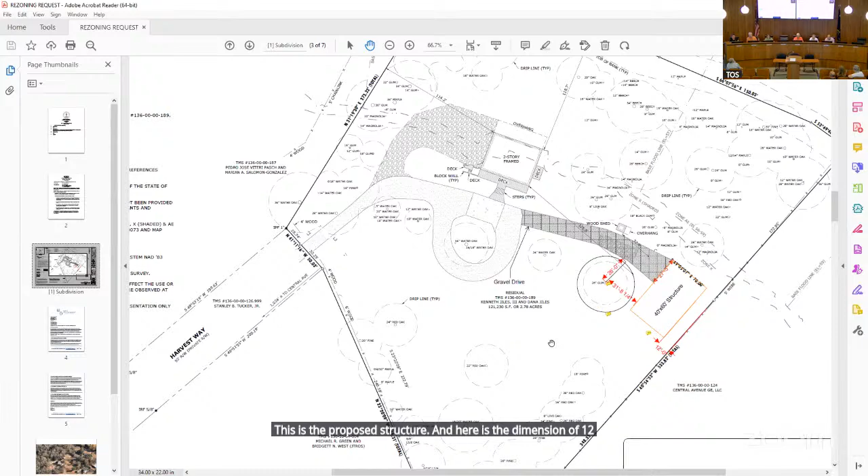Here is the primary residence. The property is accessed off of Harvest Way. This is the proposed structure, and here is the dimension of 12 feet from the property line. I'll jump to some pictures really quick before I hand it over to the applicant.

Y'all will just need to talk through your statement that was provided and answer any questions the board may have. So again, here's the primary residence. The building would be approximately in this location. And I believe this is Central Avenue. Yes, so just to give you guys an idea of where you're at.

This is just another view of the property. Again, this is Central Avenue down here. Harvest Way is right here, and that's where the property is accessed. The building would be approximately here.

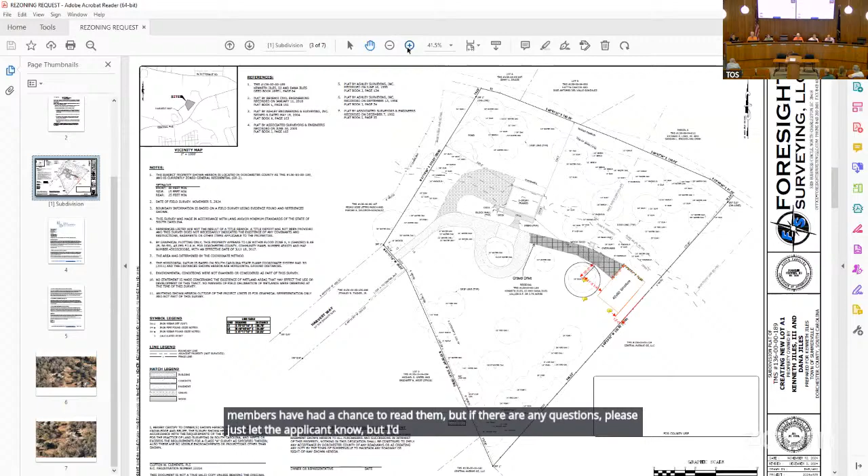Yes, sir. Are you one of the owners? No, sir. I'm actually the contractor. The contractor? Yes, he's probably better suited to answer most of the questions, but I'm happy to answer what I can. Okay. Any questions?

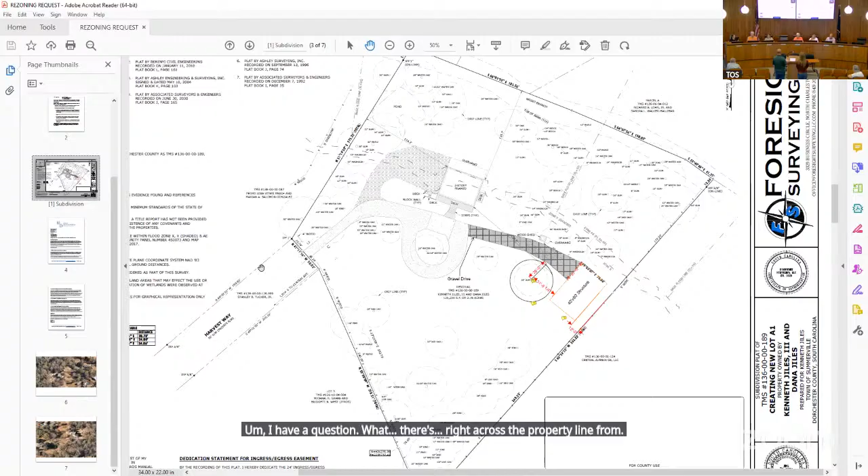I have a question. There's right across the property line from the proposed building, there's a couple of structures. What are they and how close are they to the property line on the other side? You're speaking of where we're wanting to build this structure, correct? Okay, there are a couple of businesses right on the other side. I believe it's a church that backs up to us. The building that's closer to Central that you can see, yes, I believe that's a church. But there's a couple, I mean, there were a couple on the other aerial. Becca, can you go to slide 7?

I think, yeah, that one. If this is the property with that giant oak tree in the middle, this is actually slated to be a restaurant use, but they are still working on it. Oh, I think it was a church and they just closed that church down and now it's, yes, they're going to become that. They're still working through permitting, but that was the last I had heard.

What are these structures? There are some accessory structures on the property. Really, they're just used for storage at this time. They have to maintain the existing vegetation back here if they do want to move forward with the commercial use. They were planning on having some food trucks stored behind here for use. They can't remain on the property, but they're just storage buildings.

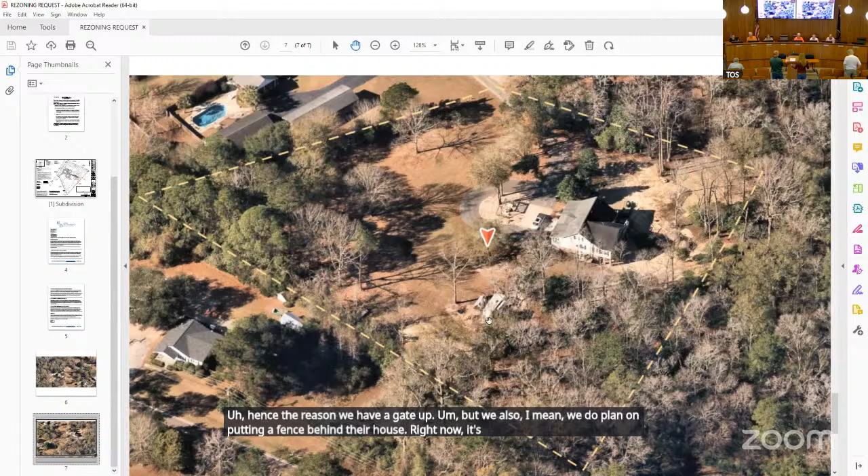Hence the reason we have a gate up. But we also plan on putting a fence behind their house. Right now it's just a chain link fence, but we do plan to put up a wood fence to kind of negate that noise.

Any other questions? Can I have a motion? Anybody? I just, 50 to 12 is a heck of a lot. Fifty to twelve is a heck of a lot.

I just want to ask, what made you guys choose 12? That is three times the distance required, but I think what they're trying to do here is save the trees and everything that's out there, and that's why they've got to sit back so much. And I believe that's a gum tree. Okay, it's a poplar, it's a beautiful, beautiful poplar tree.

My daughter has a swing set up on it, and it's one of those staples in the front of our yard. We used to have a beautiful water oak right in front of our house, and that fell the year after we moved in. I absolutely love that tree.

I don't like cutting down trees, and it's a beautiful tree, and it will make a beautiful little front yard for this structure. I know it sounds silly, but that tree is just beautiful and I love it, and I don't want it to come down.

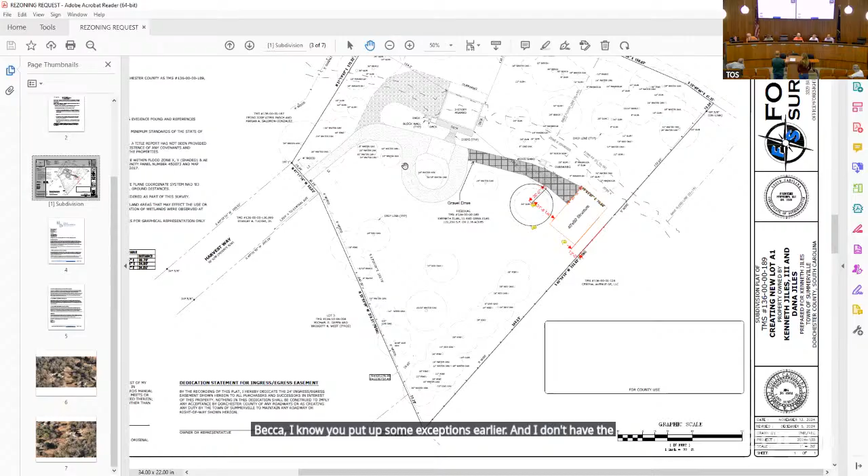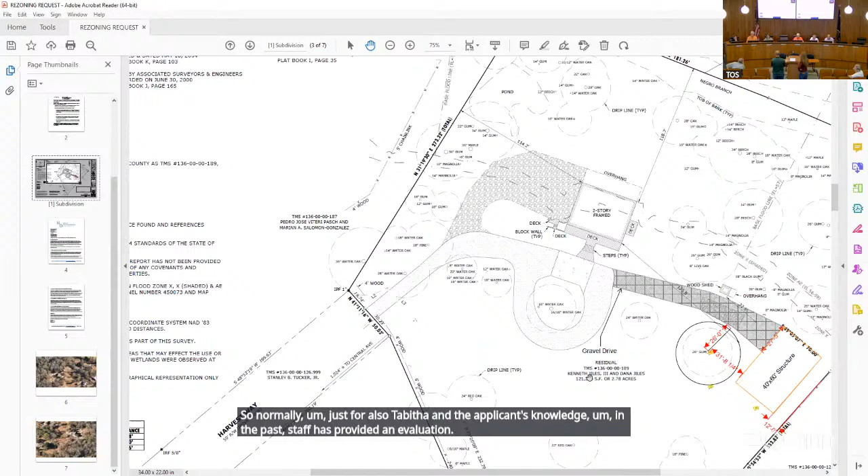Becca, I know you put up some exceptions earlier, and I don't have the packet in front of me, but did anything in the request meet the exception requirement? So normally, for Tabitha and the applicant's knowledge, in the past staff has provided an evaluation of the four criteria, but after looking at how the state addresses Board of Zoning Appeals requests, we felt it wasn't appropriate to have staff influence on that. But if you're asking for my...

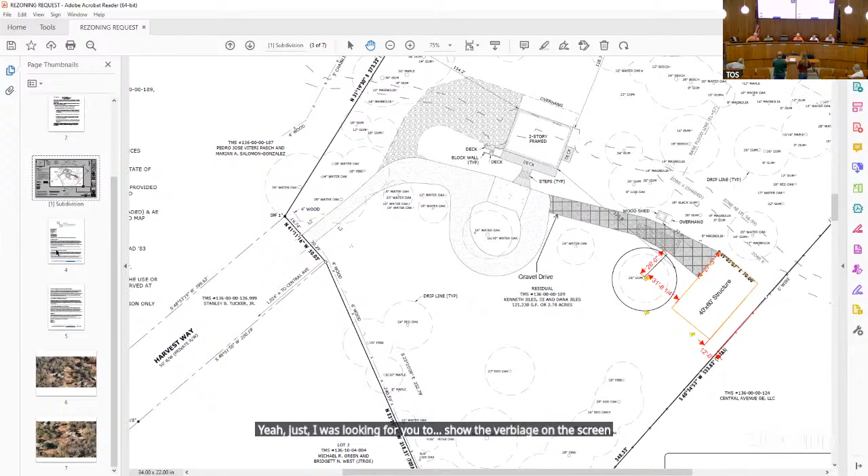Yeah, I was looking for you to show the verbiage on the screen of what their exceptions were. Oh, you mean their request? Yeah, so I don't want to put you in a bad spot. No, it's not. So basically, it is true that the building could be placed elsewhere.

It could be built elsewhere, but they have included their reasoning in their statement that was submitted. I don't know if you want to walk the board members through that statement that y'all provided. You wrote that, so we'll start with the extraordinary conditions if you want to.

Okay, so I guess I can just read it. Sure, we'll zoom in for y'all. Thanks, still working on my glasses.

The subject property contains several mature trees and natural vegetation that contribute to the established landscape and ecological stability of the lot. The combination of existing canopy, topography, and limited open space creates extraordinary conditions that make strict adherence to the 50-foot setback impractical without significantly disturbing these trees and established site features. So the proposed location for the structure avoids removal of mature trees and allows for efficient tie-in to existing water and sewer infrastructure, minimizing ground disturbance and preserving the natural character of the lot.

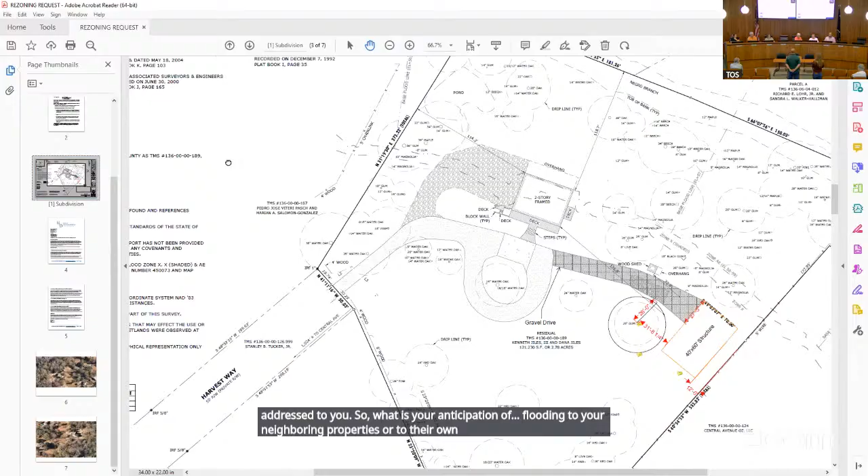So I have one last question, and if you're the builder, it'll be addressed to you. What is your anticipation of flooding to your neighboring properties or to their own property by putting that structure up? Because I know Knightsville already has its issues with flooding and drainage.

We actually sent over to the architect and the surveyor and everything to have the site plan show exactly where all the drainage and everything is going to go. Of course we'll have the silt fencing and what have you around to make sure nothing happens. But it's going to be right where it's at right now, it's a clearing anyway. It's flat, and really with them just putting their house on top of exactly what it is right now, it's not really changing much of the topography.

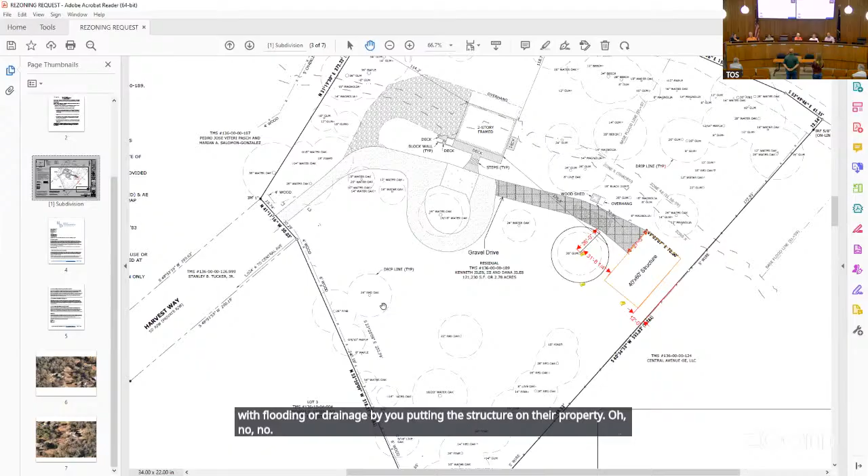No, but you don't see the neighbors having an issue with flooding or drainage by you putting the structure on the property? Oh no, not at all. There is a creek running across the back side of the property. Everything drains right to the creek.

I have a question. Does the circle around, I guess it's a gum tree right in front of the house, the proposed house, does that represent the tree line? That is a single tree right in the middle, and we were informed that in order to build around that tree, we had to have that much space, that we couldn't come within that many feet of that tree.

So the tree protection requirement for the town of Summerville is 1 foot per caliper inch of tree, based on the diameter at breast height. So that's 26 feet out from the tree in any direction as the tree protection area. The canopy usually follows that, but depending on the species or the lean of the tree, the canopy can vary. So arguably, you could move it 5 feet into the property.

Perhaps, if I'm not going to get in trouble for that tree. As long as it stays out of that protection area, it would be fine. This drawing is showing it at 31-plus feet, and the tree protection area is 26 feet. You tell me, sir, we can definitely move it up several feet. It's not a problem, it's not a problem.

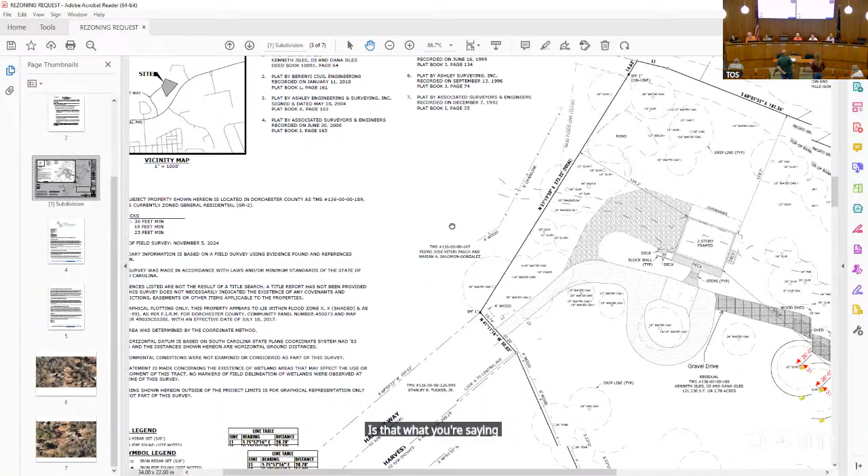So this survey is not accurate? Is that what you're saying? Maybe it's because it's not dense trees, it's not a bunch of trees right there, it's just a few. But correct, we do have a few more trees between where the structure is and where that tree line begins.

Do you mind pulling that site drawing up again? So where it says residual under gravel drive right there, like this, there's some more density, like you said, there's not.

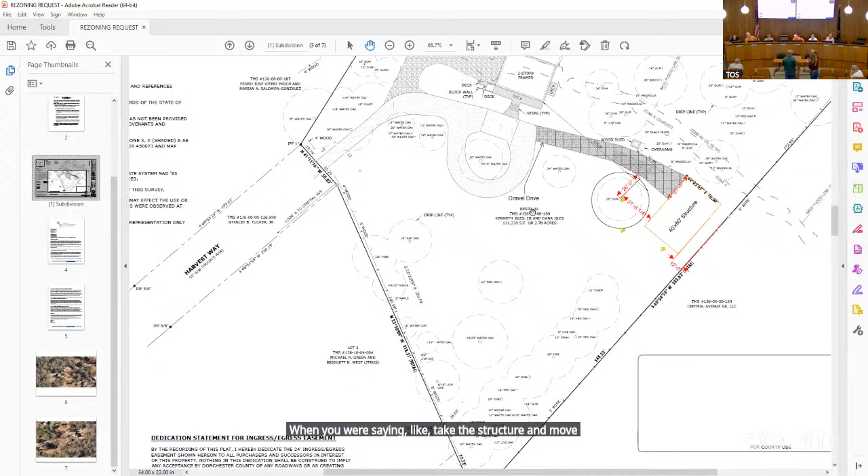No, I'm talking, when you were saying like take the structure and move it this way, is that what you meant? So I was just suggesting that there are areas shown where a 40 by 60 structure could be placed. I think that's what the board is asking, as to why it could not potentially be relocated in areas that don't impact the trees. Are you speaking of where that stamp is right now?

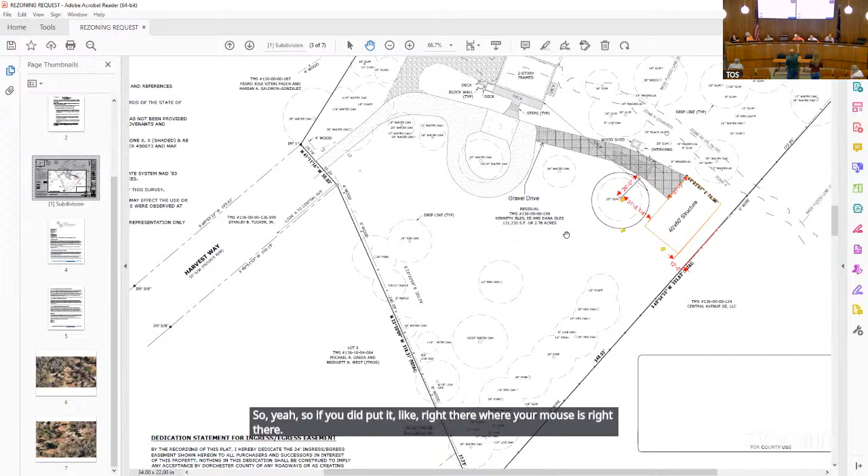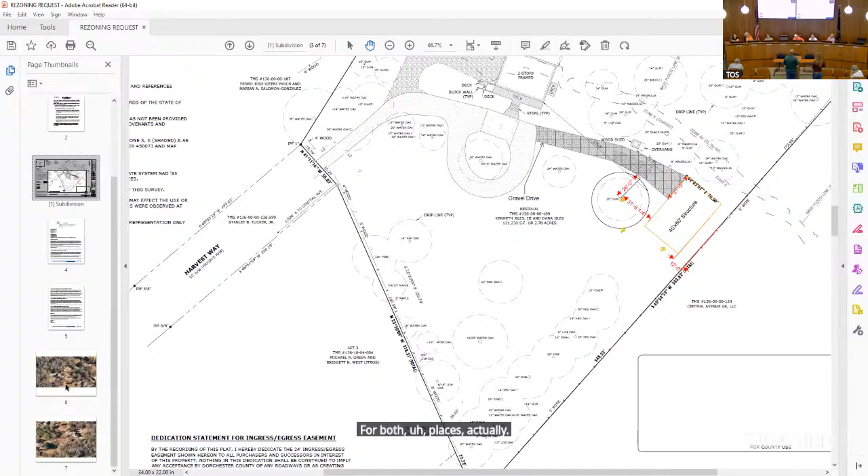Anywhere where there's not trees that this rectangle could fit, I guess. Well, so if you did put it right there where your mouse is, they will be looking out their house directly onto the other house. So they're trying to keep it spaced away, because if you put that house right there, basically you're taking out the view of the front yard for both places. So they're trying to keep the front yard as open as they can, and keep all the trees and brush that they have right now. And trying to put it somewhere it makes sense, like our front yard is very open, and that's part of the charm of our land, that it's open and welcoming, but if you put a house right in the middle of it, that doesn't make sense.

The only other thing I would say, personally, this is just my personal opinion, is later on, if they wanted to sell the property, if the structure is where we have it suggested, then the new homeowners are going to pull in and see a very large yard, and it's going to be very appealing to them. Of course, I'm talking if you all sold your property, what have you, but if you put it in the area that you just had in there, that really takes away from the beauty of this yard, because you can see the mature trees that they have there. It's very pretty.

Mr. Chair, given the exceptions and just what I'm looking at, and the way it's situated on the property, I'm gonna make a motion to approve. Do we have a second? Second. Any other discussion? All in favor, raise your right hand.